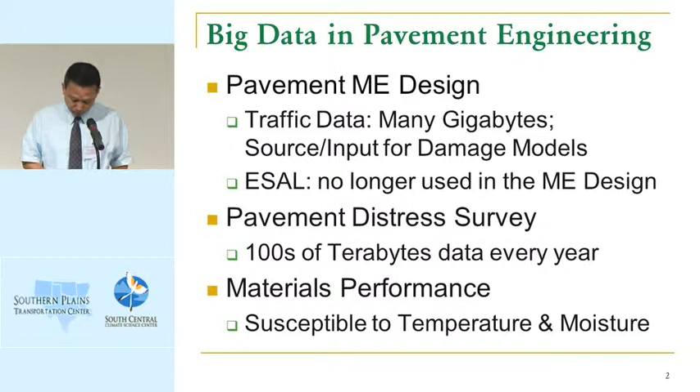So the focus of the presentation is essentially regarding new technologies for pavement design and management, okay, and what kind of relevance they have to the climate. Now, first, let's talk about pavement design.

The existing design most states use today is based on the 1993 AASHTO guide. And that guide has many limitations, okay? The biggest limitation would be how traffic loading data is used in the thickness design calculation.

For those familiar with this design process, essentially we convert all the traffic loading from passenger vehicles, pickups, full-size trucks, 18-wheelers, and everything else into a standard ESAL, 18 kips axle loading. It's very logical and relatively simple. However, that kind of concept has many limitations because the data is way, way inaccurate, okay?

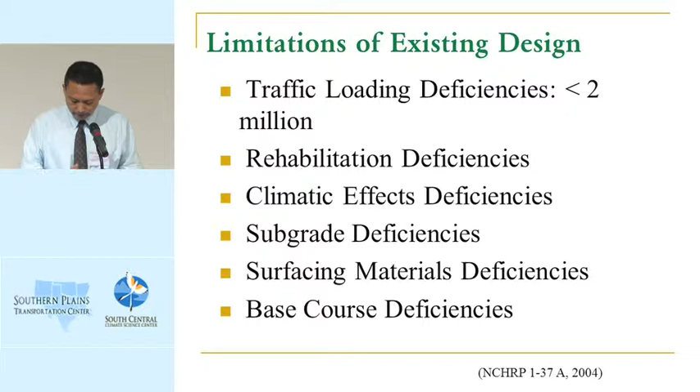And of course, there are other limitations of the existing design process. I'm not going to go into too much detail because, as I said earlier on, the first part of my design focus is on the traffic side.

As you can see, this current design handles roughly 2 million ESALs. But again, as we go on, our loading increases drastically. And even for the magnitude side, the current design is not efficient.

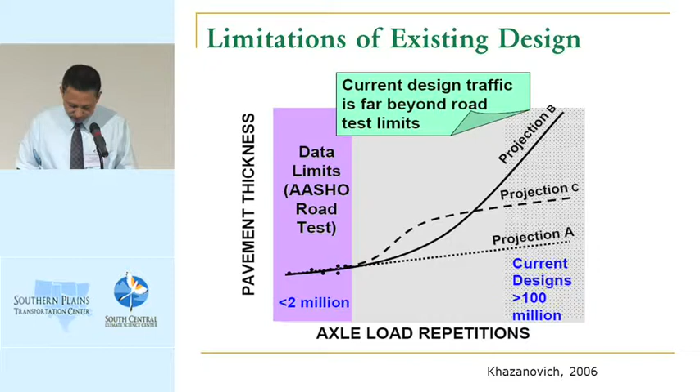Roughly 15 years ago, there started a national effort saying that the 93 design guide was useful, but it has so many limitations. Let's start with something brand new. This brand new is the system design of this new process.

We have climate that impacts materials, as I said earlier, traffic, structures, and how the pavement responds to climate, materials, traffic, and everything else. And then, of course, the damage model, and how we can figure out what the distresses will be in the future. This was documented roughly 10 years ago.

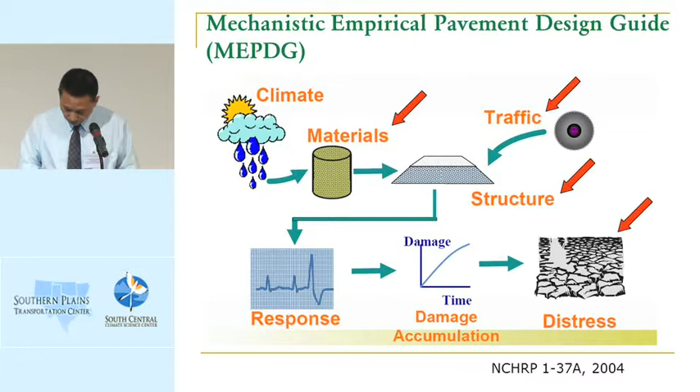There are many advantages. I'm not going to read the whole slide, but the biggest advantage of the new design process is people started all over.

They essentially said, okay, here's what science says, here's what the mechanics engineers or scientists would do or would think.

Let's start from the science side. Let's start with the loading first, the damage model first, and how the loading would cause the new strain-stress relationship.

And how that relationship can really become the damage model, as we know that pavement deterioration is not caused by passenger vehicles, it's really caused by big trucks, and how that process can be modeled accurately.

So that's the biggest issue in the new mechanistic and empirical design process.

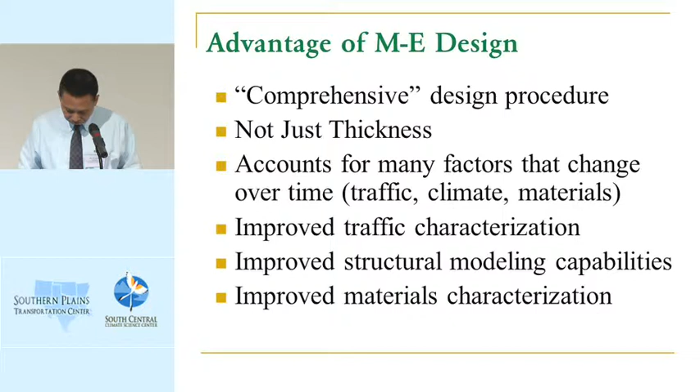It incorporates many transfer functions, such as we can predict roughness and various types of distresses like rutting and cracking. Another important thing for the new design is a tool for forensic analysis.

For example, if you have temperature change, moisture change, rainfall change, you can easily tune this new design process to figure out what kind of information you can get out of that.

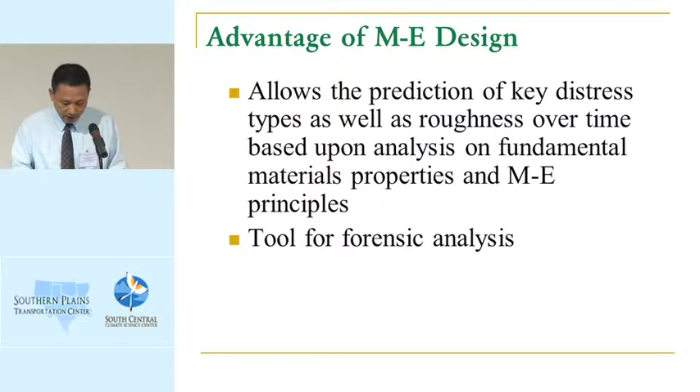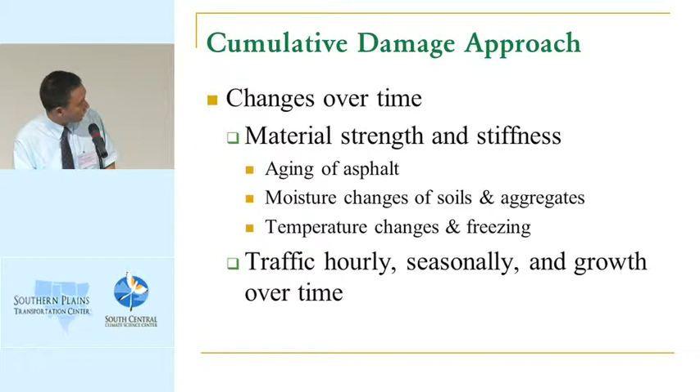The cumulative damage approach, which is extremely important regarding the loading and the damage, etc. For example, we consider traffic, hourly traffic, season, growth over time, and everything else.

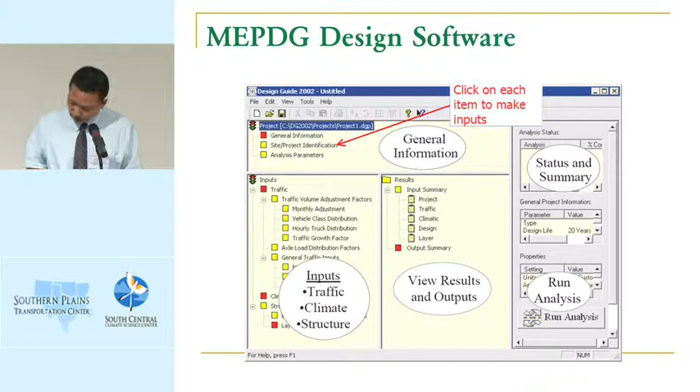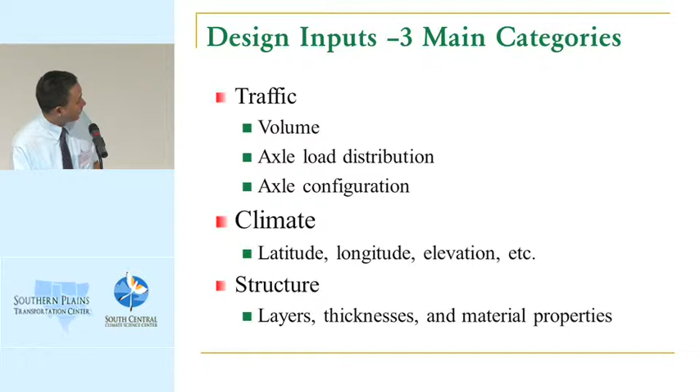There are three main categories of input for the new design process. We have traffic, which is very, very, very important, climate, that's what we're here for today's conference, and of course structures by itself, including material properties.

And then there are three design levels. Level 1 is site-specific. Level 2 is more like statewide or regional, and level 3 is more like national default.

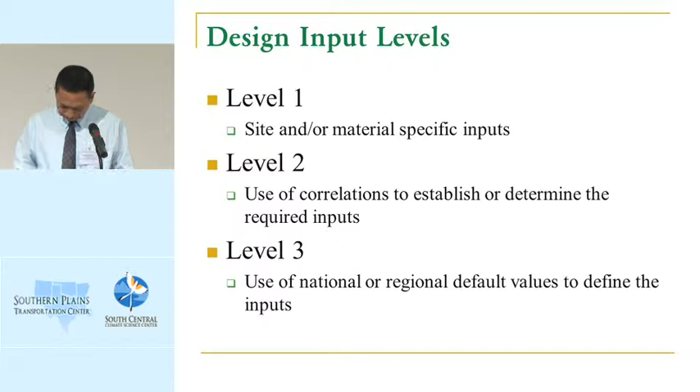Okay, why does the 93 design guide have issues, right?

Equivalent single axle loading, as mentioned earlier, ESAL, that particular number is a single number that essentially tells you how much traffic loading this pavement will experience in your design cycle.

You say it's 10 years or 20 years or 15 years, and so that's a standard 18 kip axle loading there.

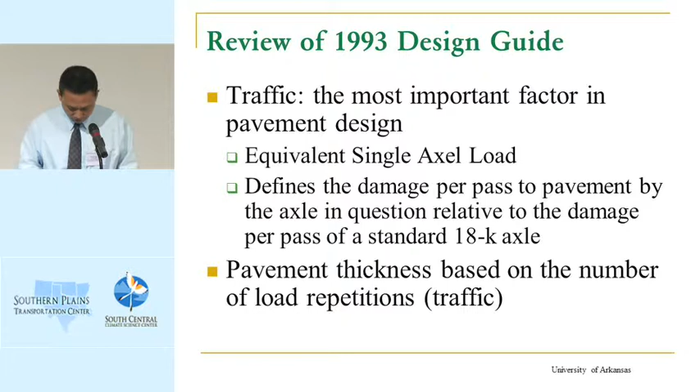And it's based on a single equation, the entire pavement design process.

When you look at this, this is essentially the loading 18 kip ESAL number, and then you have various parameters in there, including structure number, pavement layer depth, and serviceability values, and many other numbers.

Now, this is essentially a single function that can do the whole thing, and a lot of people still use it today.

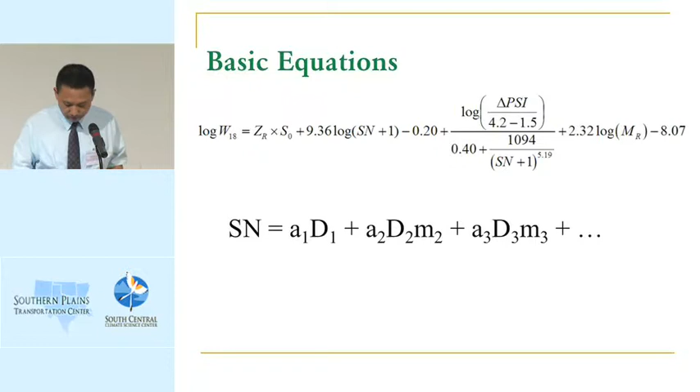In the ME design, essentially, you have to look for a lot more detailed information regarding traffic. For example...

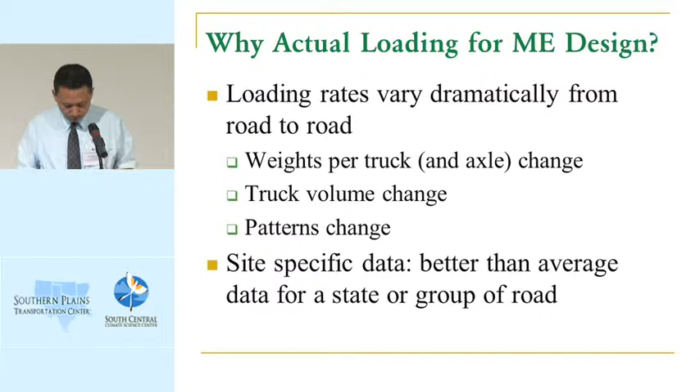ESAL goes away in the new design process, and the traffic input will be axle load spectra based.

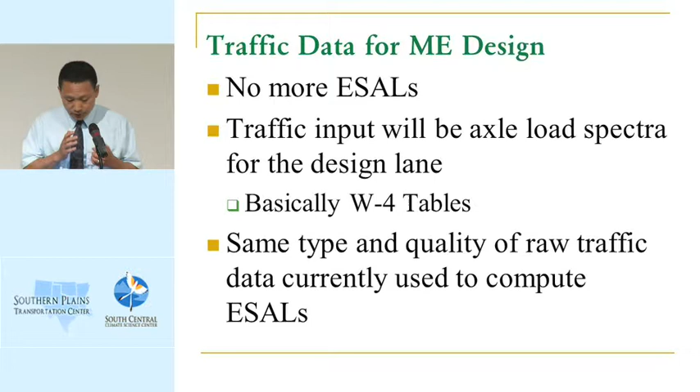Essentially, you have to tell what kind of vehicles you have on your road and how many axles that vehicle has regarding configuration, and what is the loading for those axles.

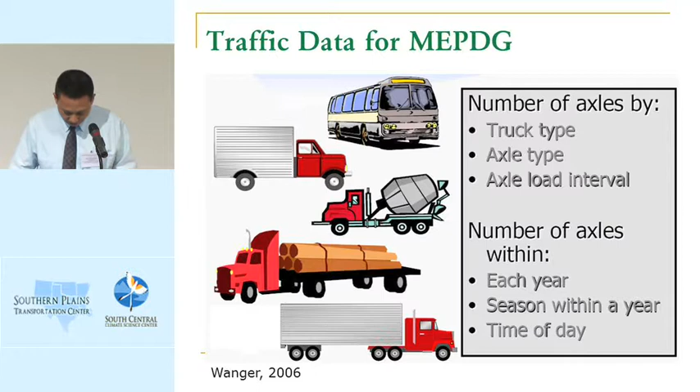This is a typical example. You have buses, you have pickups, you have those concrete trucks, and you have other haulers, and then you have 18-wheelers there. And similarly, traffic level inputs also have three levels, 1, 2, 3, and level 1 is the most accurate, site-specific.

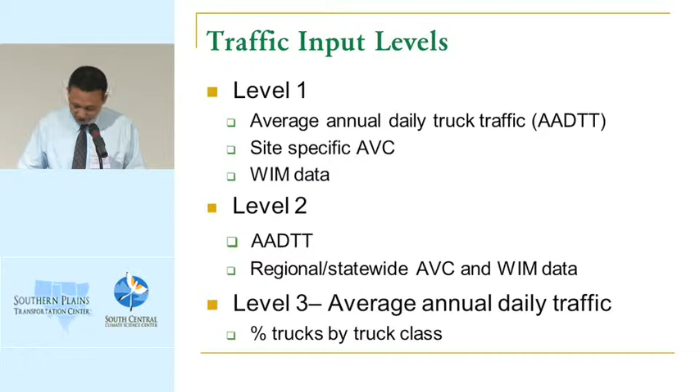I'm just going to show you some slides, and then I'll come to what we've done with our research.

See, hourly variation, 24 hours, and each hour has a different level of truck volume in this particular case.

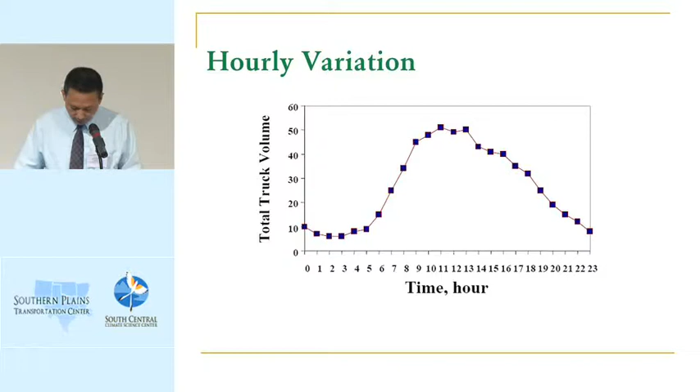And daily volume, class 9. Class 9 is the traditional or commonly used 18-wheeler. As you can see, they have big variations regarding volume on a daily basis.

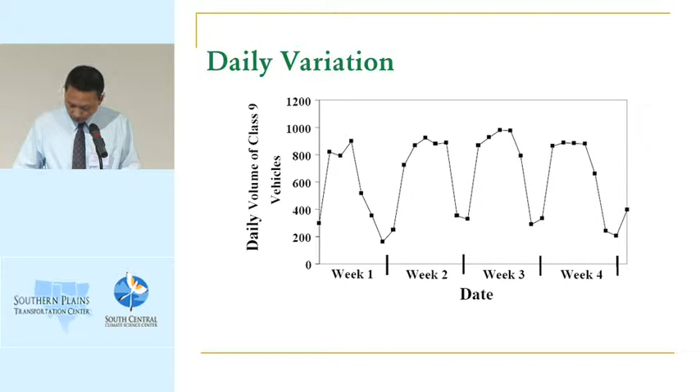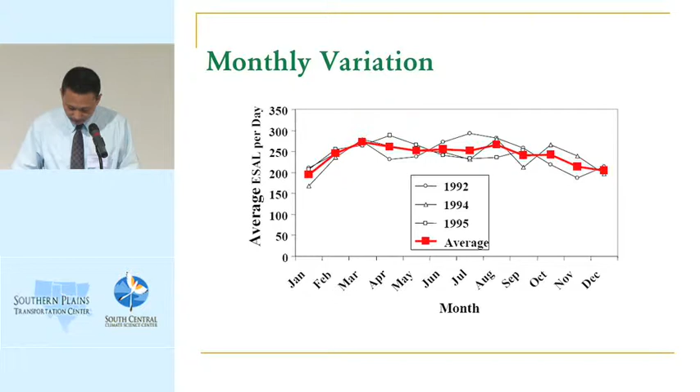Monthly variation. As you can see, in the summertime, we tend to have more truck traffic than the wintertime, and the annual variation as well.

Annual variation. Now, this is the so-called load spectra, and that's what the new pavement design guide uses. This is just illustration of a set of data.

And when I tell you later how much data we really work with, it's a lot more than that, many magnitudes more than this.

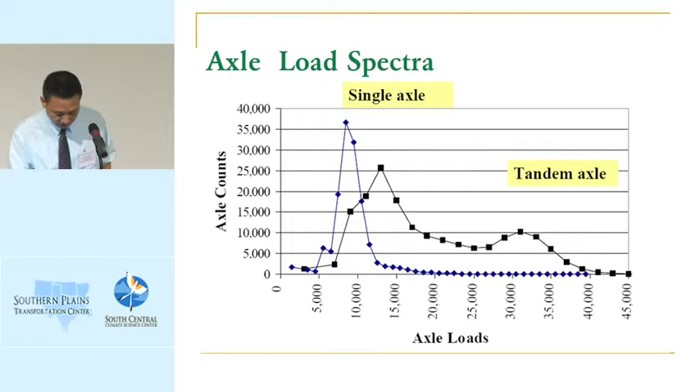Now, when I say we need to know the type of vehicles on the road, we need axle configuration, we also need to know the loading on the axles. How do we find that out? Can we send people to count, or just use the weigh station on the highway side? Or do we have a better technology?

And actually we do. Transportation planners have been relying on a technology called weigh-in-motion, WIM, for a few decades. So roughly 15, 20 years ago, pavement people said, okay, you guys are already using this technology, we can rely on the same thing to figure out truck volume, axle configuration, and axle loading. And that's exactly what we're doing today.

Traffic monitoring guide. There's a guidebook published by Federal Highways that is used as the baseline to qualify the data from those WIM stations.

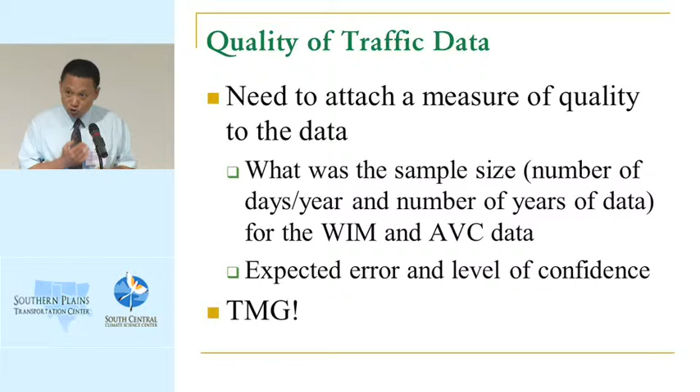For those who had any experience with WIM, we know that WIM sensors produce lots of errors. When the WIM sensors provide inaccurate data, what do you do? You try to get rid of the bad data and retain the good data. And that's what we did here.

We developed a technology called PrepME, which essentially is a preparation software program to prepare data for ME design. This particular project was initially funded by Arkansas DOT and later by Federal Highways and 8 other state agencies, and it became a pooled-fund study.

So essentially, it's a software system we designed that can help users prepare data, not just traffic, but other data sets including climate data, so that pavement designers can use this software as a resource or tool to help them use the actual ME design guide in an actual engineering exercise.

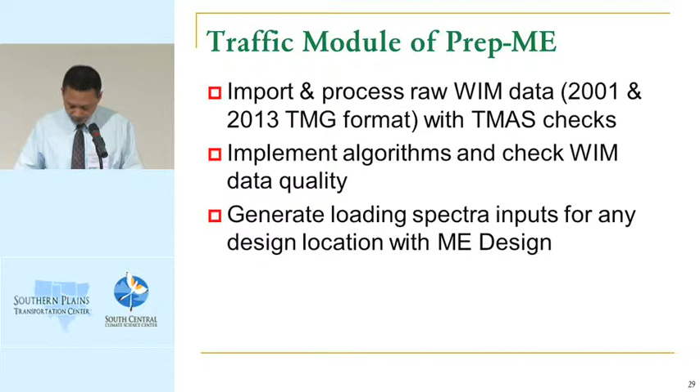So we use the TMG format, which the first version was released in 2001, and now we use the 2013 format. TMAS is another system developed by Federal Highways to check traffic data quality from WIM sites, and we use that as well. It's a very robust SQL server-based system.

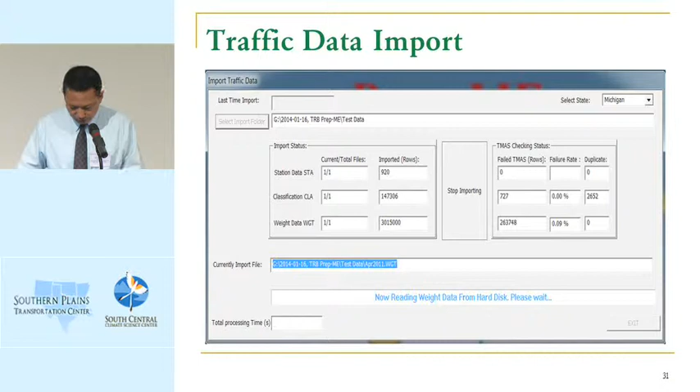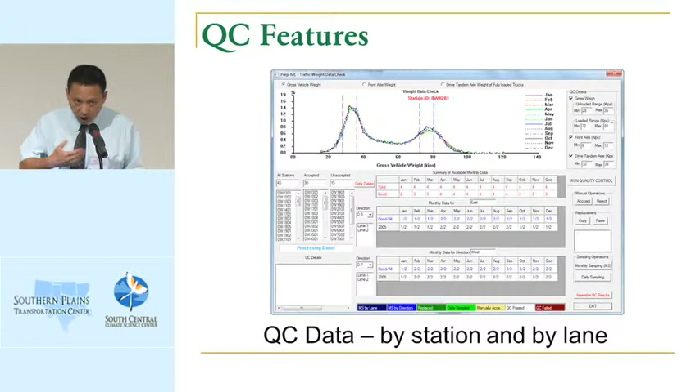If you got data from a WIM site that goes like here or stops like here, that means either the WIM sensor was miscalibrated or is bad. So we use this software to automatically check if the data from your WIM sites is good or not.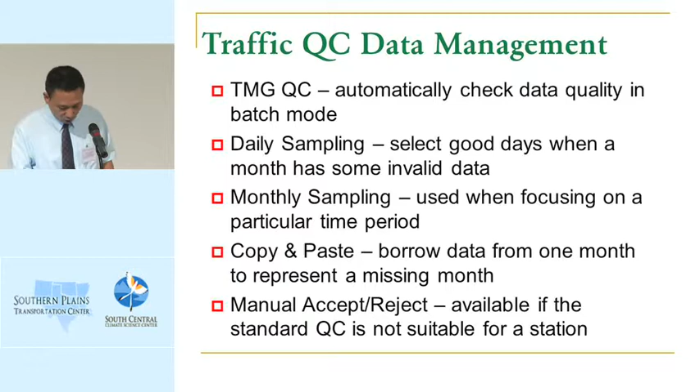Anyhow, the TMG QC, we use that. We use daily sampling, monthly sampling, and we have a whole bunch of copy and paste functions and manual processing to accept or reject data into the process. And then we generate the traffic load spectra for ME design.

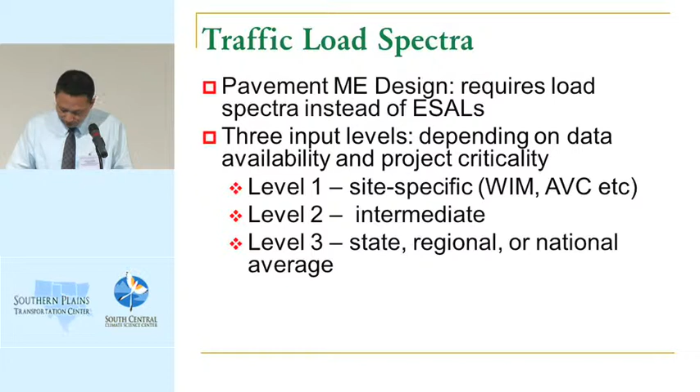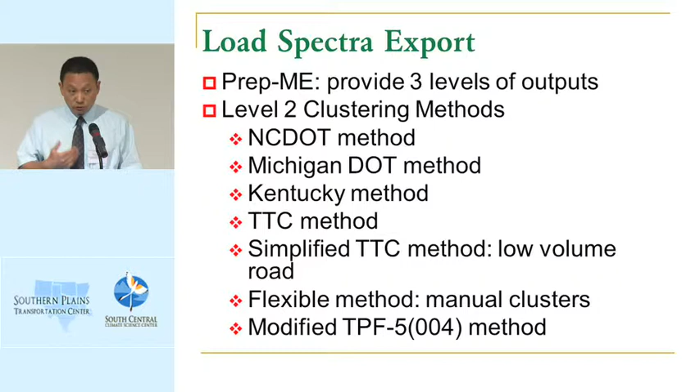We currently use the North Carolina DOT's clustering method, also Michigan DOT's method, Kentucky's method, and TTC's method, and a simplified TTC. Both are already built into the ME design, essentially to refine and prepare high quality traffic data for the design process. This is just one visual of the load spectra output that you can use for the ME design process.

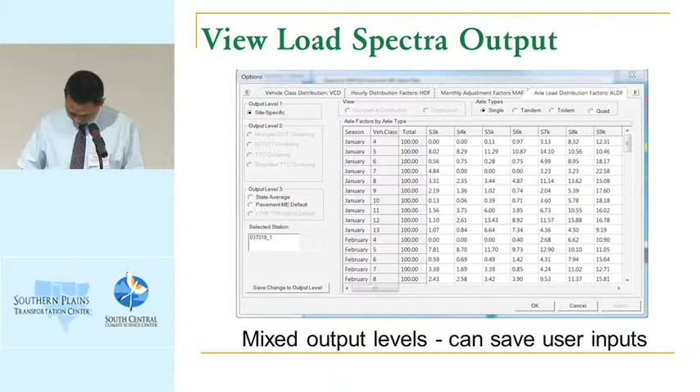I mentioned earlier about clustering, which is very important for those who study statistics. Clustering essentially is a methodology to gather information from the big data or from the population, trying to find a pattern from your population that can fit your particular site. And that's exactly what we were doing for the traffic data.

When you design a pavement section on a specific site, you want to estimate as best as possible the traffic loading and pattern for your particular site. That's what the clustering does here.

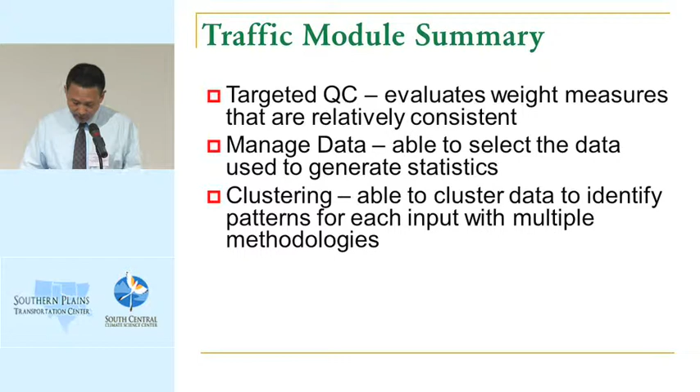Climate data is very important, and it's not because we're in the climate conference today, but it is a critical piece of information that we can import from several national data sources regarding essentially the rainfall and temperature on an hourly basis, on a daily basis, so that we can incorporate all that information into the design process.

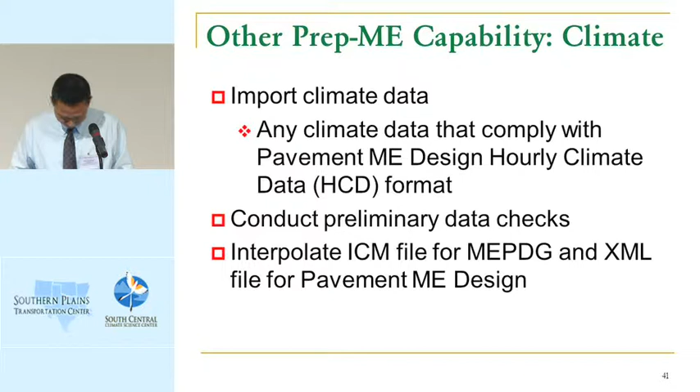Okay, now the title of the presentation starts with big data. What is big data?

I mentioned earlier the 93 design process, or design guide by AASHTO, only requires a single value for traffic loading, called ESAL, either 2 million or 1.5 million or whatever that is. In this new design process it's a completely different picture, because we're really looking at hundreds of gigabytes for an extended period of time for a DOT. Hundreds of gigabytes, guys, instead of a 2-byte value. So that change is huge. It's not one magnitude, it's many, many magnitudes, okay?

Then the next thing you need to worry about is data management, data qualification. That's exactly what our software does for this. So that essentially finishes the first topic on pavement design, on what we've done in the last 5-6 years in developing this technology to help state agencies prepare data for the next generation pavement design system.

Now, big data for pavement distresses. So switching topic to pavement data collection. As we know, pavement distresses and profiles are all very, very important for pavement management, also for design. As we know, in the new ME design process it requires historic data for calibration purposes for roughness, rutting, and cracking.

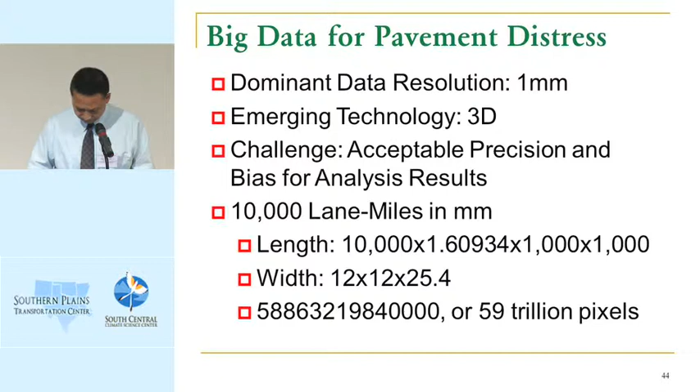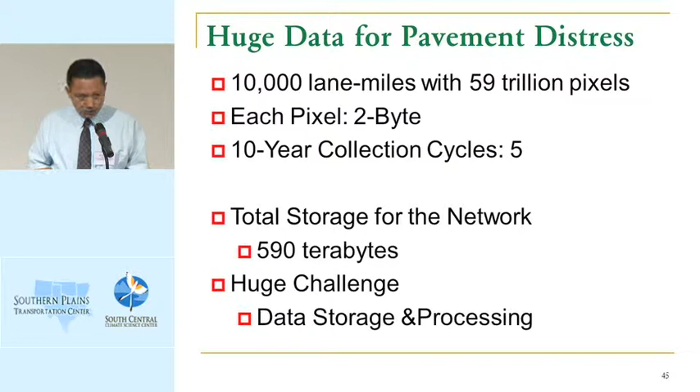So it's a huge, huge challenge, even for today or the next couple of years, for computer technology to archive the data, just for one DOT, okay?

Now, this is the new technology that we developed through the years - first when I was in Arkansas, and recently at OSU. This is the vehicle we just put together this summer. This is our second 3D vehicle for R&D purposes.

Yes, you can probably see vaguely something shining on the ground, kind of greenish - that's called the green laser. We started using green laser, and when I showed this to a guy from Sweden, he was really happy. He said they're trying to work in the German market, and in Germany there's a law prohibiting using invisible laser light in public. So if you're using infrared or near-infrared laser, those kinds of lasers are largely invisible - that's what all the other guys are using today - you actually cannot use that kind of device in public areas in Germany. So that's very interesting to know.

Essentially, this vehicle can scan the road at highway speed, 60 miles an hour, across roughly a 14-foot wide lane, at 1 millimeter resolution, with 2 sensor boxes.

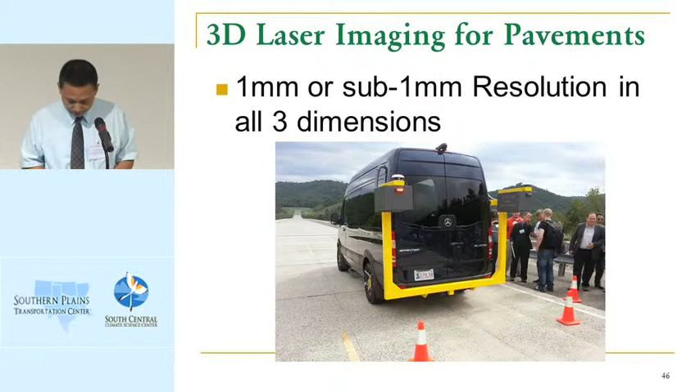So we are able to work on highways, and we are able to work on airfields as well. I have some visuals to show you.

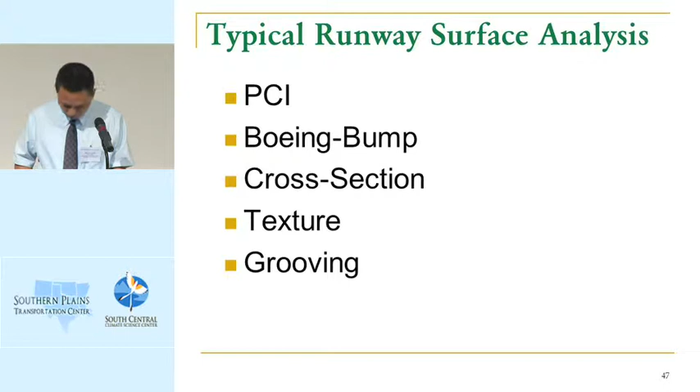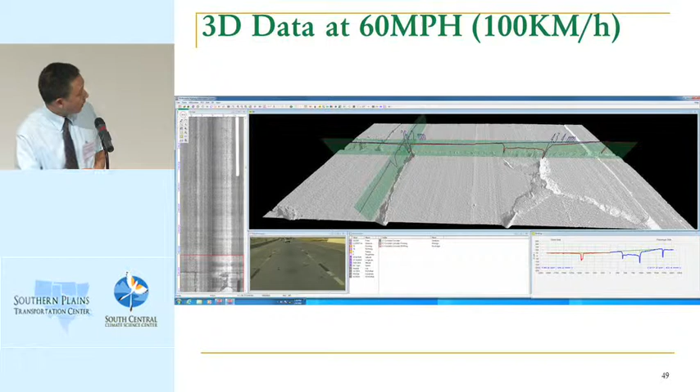We collected this a couple years ago on I-35 going from Stillwater to OKC. As you can see, this is the original concrete surface, and it deteriorated quite a bit along the joint. This is the close-up, and that's the quality we're going to get at 60 miles an hour, complete coverage, roughly 14 feet wide, and every millimeter, every pixel, we have a data point. And that's the big data we're dealing with today.

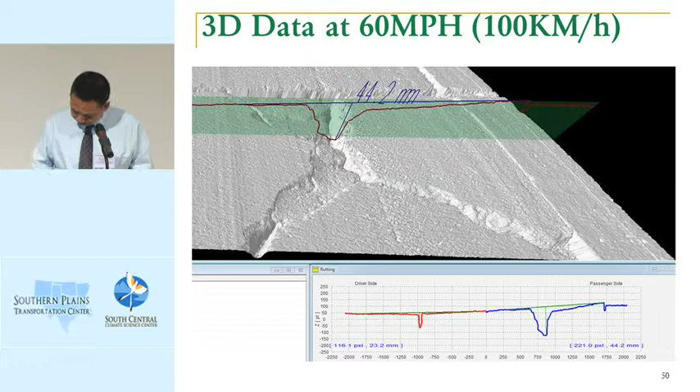And the big challenge, as I told you earlier, is how to process that kind of vast information real fast, very efficiently, and accurately to get the results you're looking for. So right now, the sensor technology is very, very good, is completed, and then the main challenge is how to provide solutions to users.

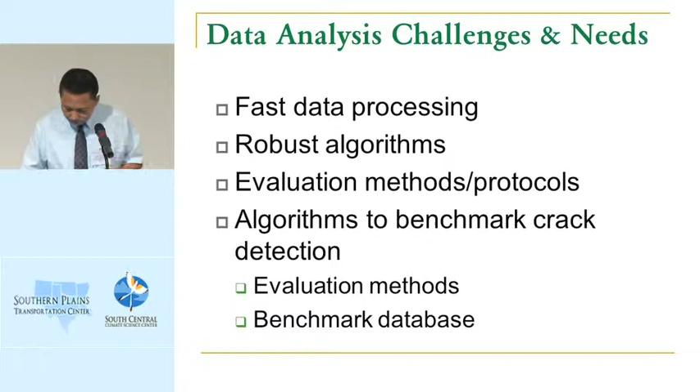If you do a quick calculation, if you drive at 60 miles an hour, every second you have roughly 28, 29 meters. That translates to roughly 30,000 lines, 30,000 millimeters. That's how we design our sensors to handle this kind of speed. Remember, this speed is not just a point, it's a line. So every second, I have 30,000 3D lines. Each line is about 14 feet wide or 4 meters long, essentially transversely across the pavement. So every second, I can get 30,000 lines out of the sensors at that speed.

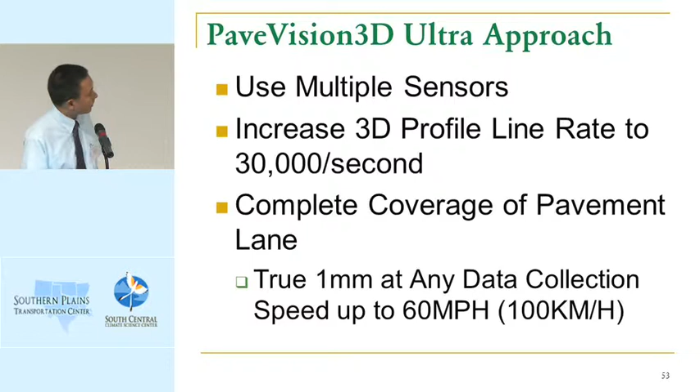So this is the visual that I showed you earlier on. Here's another visual on the I-40 bridge in Oklahoma. I'm going to show you some visuals on the runway we surveyed this year.

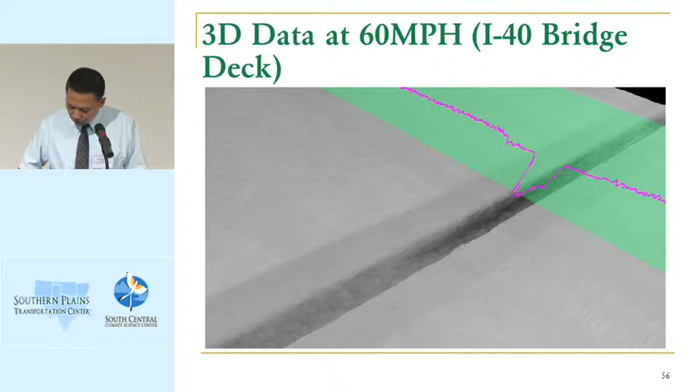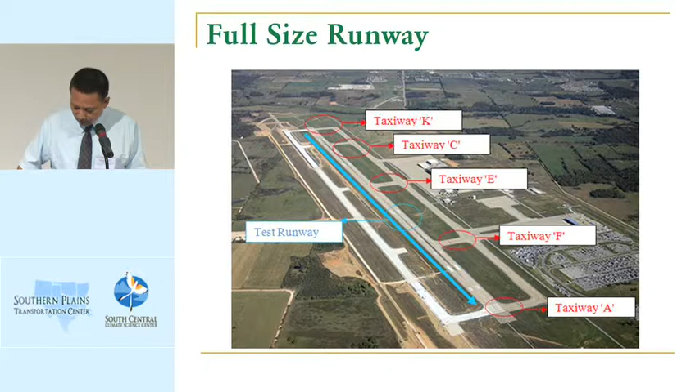It's a full-size runway, concrete, and it was not open to traffic. So they asked us to go take a closer look, and we did. This is a visual. We use our 3D system.

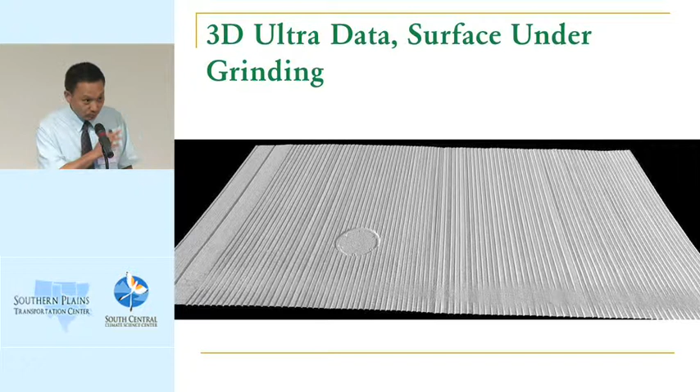Okay, I'm going to show you why they did that. Brand new runway, $30 million. You see the problem on the runway surface here? It's not even. So essentially, the big contractor hired a rookie engineer to be the supervisor for 3 months to lay the runway. And the guy probably, when they took a lunch break or whatever break, they forgot to turn the machine off. So that's the quality you're getting when people are not experienced and trying to do a big project there.

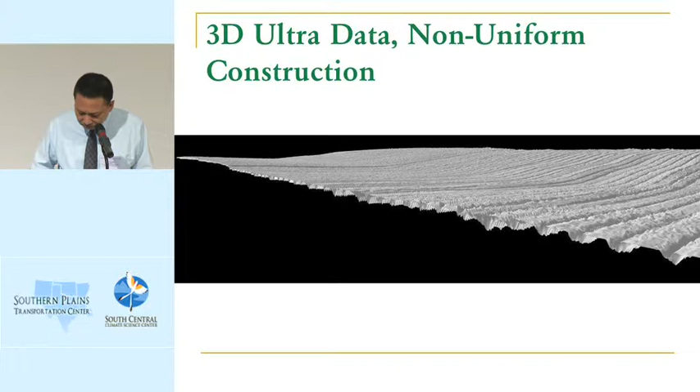And our machine is able to detect those variations. Another thing is, you said, okay, runway is so wide, right? Runway is about, the full-size runway is about 150 feet wide. And how do you use a vehicle which covers only 14 feet to survey the runway?

We do have a trick. We actually develop a software that can, we run our vehicle back and forth, like 20 times or more. And then see those data passes? Each pattern is a pass of the vehicle, okay? When we got the data, we're able to stitch them together so they do not overlap. So this will be a complete runway.

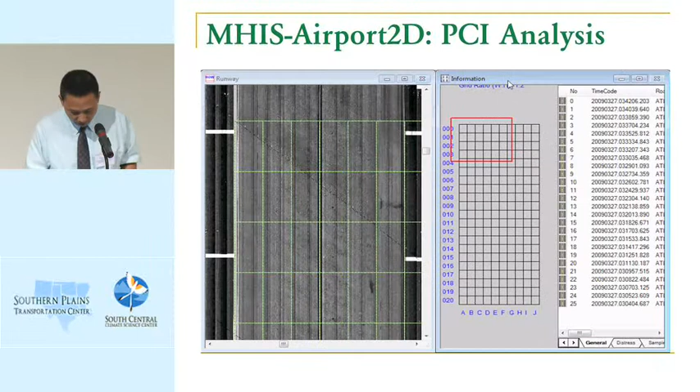This actually is the starting point of a runway. And we have a software that can actually stitch them together and do PCI analysis from there. Okay, this is a visual that we did with a 3D surface of the runway.

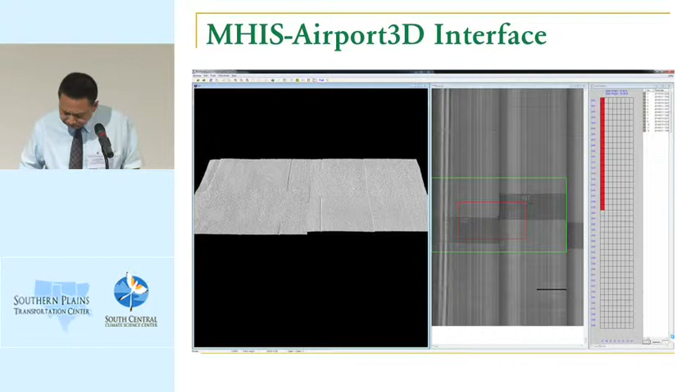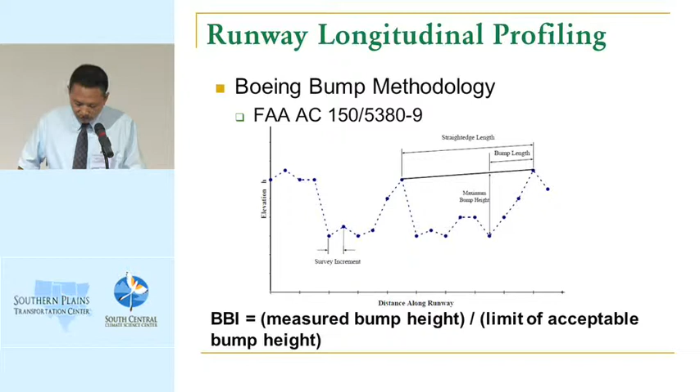And the Boeing, this is runway longitudinal profiling, which is very different from highways. In highways, we use IRI. On our runways, they call it Boeing bump methodology, and it's very well defined in the FAA advisory circular.

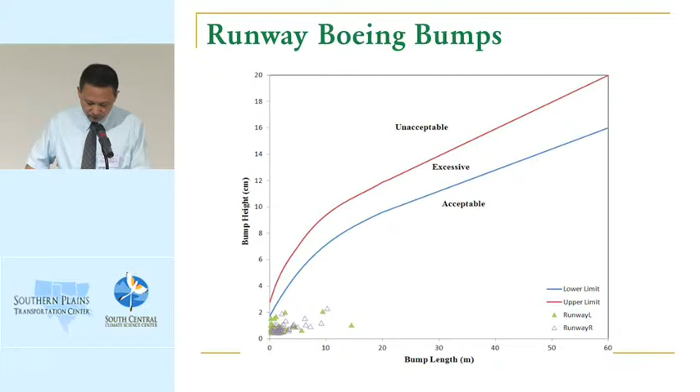Those are just some visuals, figures we developed for this particular airport. Boeing bump index there. Okay, I'm toward the end of my presentation.

I'm going to show something kind of fun here. We have seen grooves before, right? Some people call it tines or tinings on highways. On runway or airfield, we call them just grooves. FAA has very specific definitions of the depth, the width, and the spacing of grooves.

But even today, there's no technology to measure the performance of the grooves in the field. FAA said when you construct your runway, you put your grooves on, and that's the specification. You follow that, then you're okay.

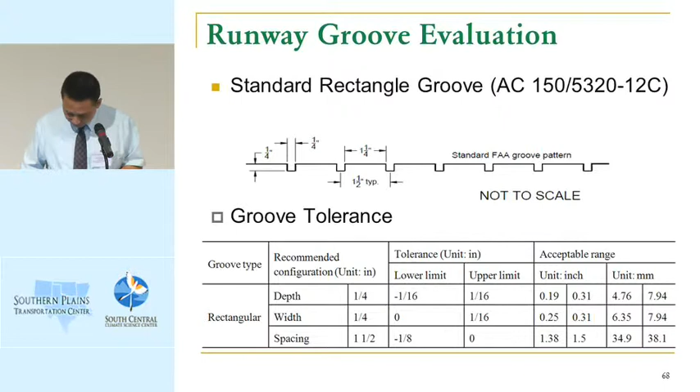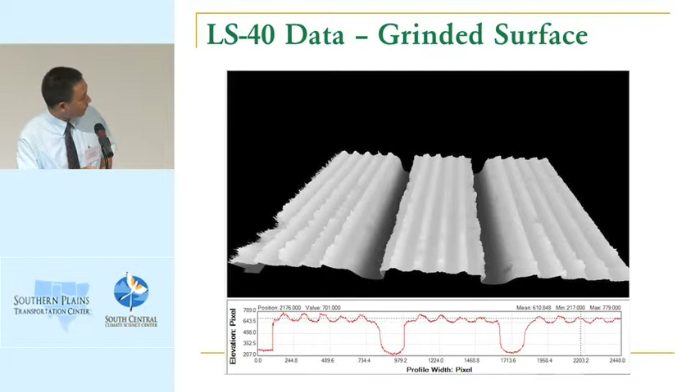It has specific tolerances, if it's good or not. See, this is the new runway's grooves. As you can see, it's not even, and this one is even worse. See the grinding here? That's from our 3D data, and see the problem here and everything else.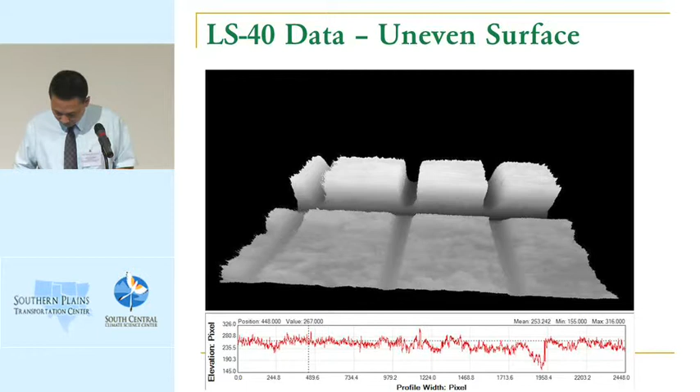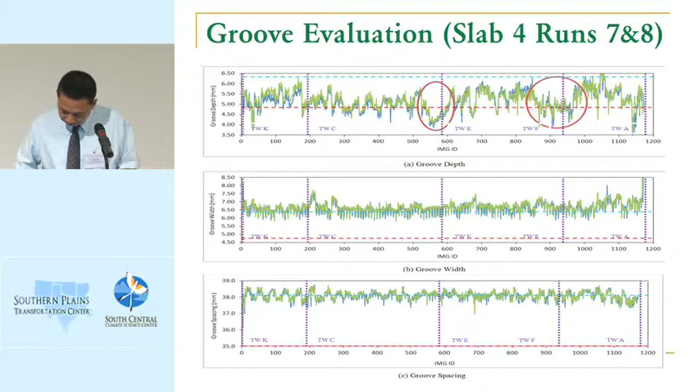We have software essentially to evaluate groove performance. We exaggerate the vertical scale so we can have better visuals, and then we see areas that are out of spec on the new runway. We can do cross-section measurements and cross slope.

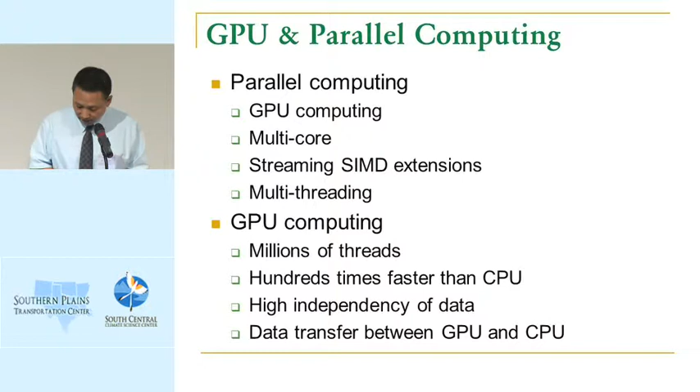I'm going to stop showing the data, but I'll talk briefly, maybe a minute or two, about a new computing technology we're using in the lab now, using GPU and parallel computing to handle the massive amount of data. We're really dealing with terabytes and terabytes of data at one time—how to load it, how to save it into memory, and how to look for defects in those terabytes of data sets.

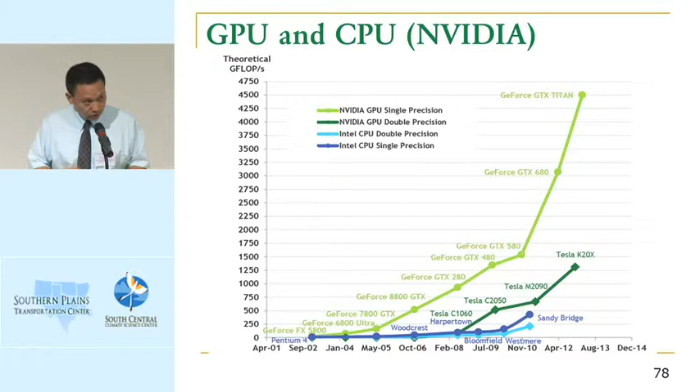This figure came from a company called NVIDIA. They showed the GPU performance is literally one or two magnitudes higher than the fastest CPU you can have today. For those who play Xbox One or PlayStation 4, that's what they use for the games—GPUs. We're doing the same thing in the lab, trying to use parallel processing that can increase performance by a factor of 10. We've seen that, and we actually have products out there today doing the processing, relying on GPU.

A little bit more visuals on the processing we have for cracking.

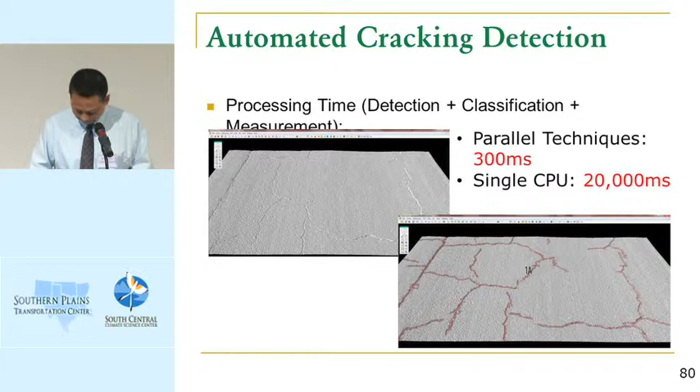Right now we cannot automatically detect the deterioration level of the steel bracing on bridge joints. That's what we would like to do in the next year or two.

Another subject I didn't address—I literally don't have time. Jerry gave me 40 minutes, and I think I'm very close to that.

Rainfall on pavements or runways, essentially water on runways, is a safety problem definitely related to climate issues. It's a big issue for runways and also for highways. We use grooves, tines on the surface of pavement, not to improve friction but to relieve the water as fast as possible from the surface, and it's very effective, supposed to be. We're working with FAA right now and also Federal Highways. We have contracts at OSU studying rainfall intensity and the geometries of the runway and highway, and how they develop water films that can impact traction of vehicles' tires or airplanes' tires.

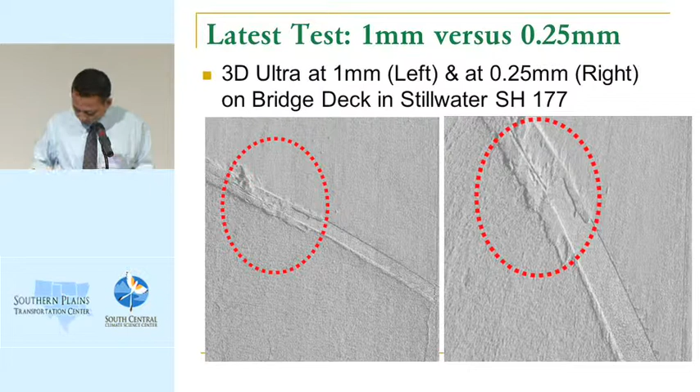In conclusion, big data. Big data has been a buzzword for the last year or so. A lot of people in the internet world talk about big data, but in transportation we had big data long before internet big data existed. We are big data people—talking about ITS, connected vehicles, and pavement engineering. If you want the gigabytes we have, or the terabytes, next thing you know is petabytes—I had to look that up on Wikipedia—and then exabyte, which I knew because there was a company called Exabyte. So it's a very exciting and challenging world.

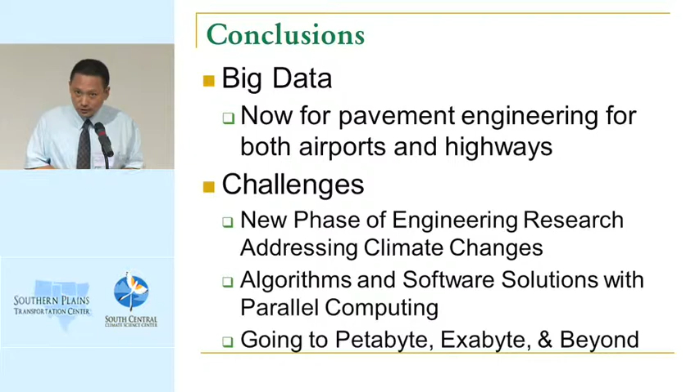We learned a lot here today from climate scientists. I had some doubts, Musharraf and Jerry, about setting up this conference to talk about something not really transportation engineering, but related. It's been eye-opening to see what OU has been doing with climate research and other schools. We are very fortunate to have OU host SPTC—it's a great center, and we enjoy all the benefits of centralized funding for our partner schools. So, appreciate that, and I guess that concludes my presentation.

I know I have a question, but I'm going to let you guys ask questions first if you have one. I see one here. Go ahead.

It was a nice presentation because you compared the AASHTO 1993 design guide with the 2004 MEPDG. So now as far as we are talking about the climate, you touched upon how traffic characteristics are incorporated in MEPDG. That was really nice.

I think you'll agree with me that the climate component of the MEPDG is key. Right now the design procedure collects weather station data from 5 nearby stations, and that climate data is older, probably from a database 20 or 30 years back. But climate scientists today are looking at what the trend of weather station data will be in the next 20 or 30 years if we want to construct a road. I think this is a particular area we should work on.